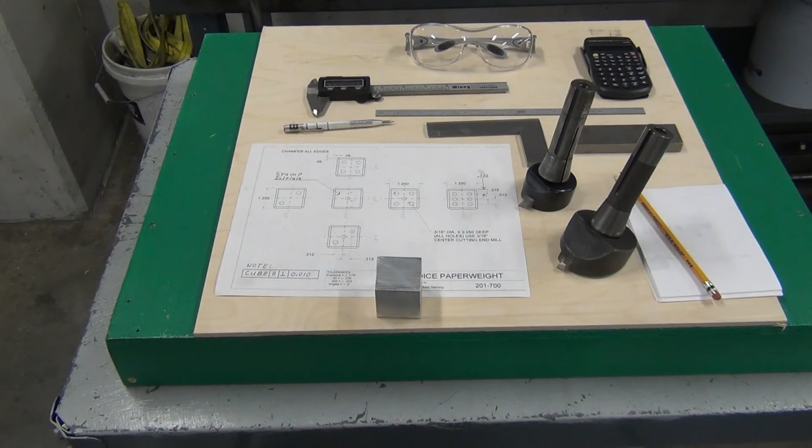Okay, now that we have the block sawed out, we're going to begin squaring the block up. That would be the next step in making the complete project. We're going to make this particular project 1¼ inch by 1¼ inch by 1¼ inch square. That's going to be the end result.

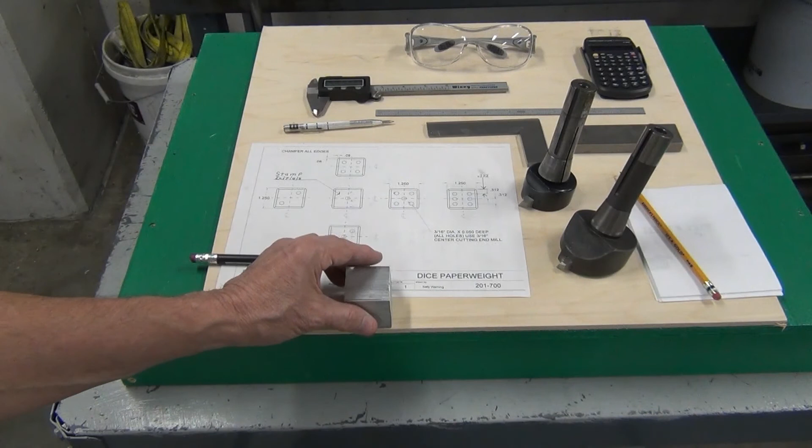When we first get started, we're going to machine these rough sawed cuts to get them to at least a reasonableness, because in their present state they are of no value. The first one we'll eliminate by cutting one of these two surfaces first.

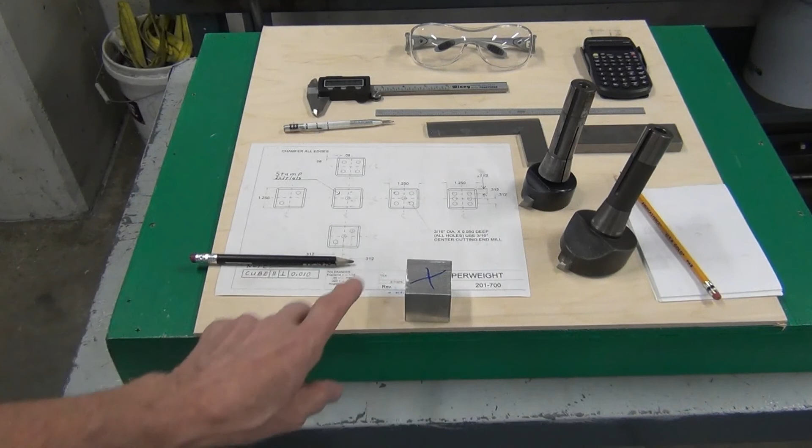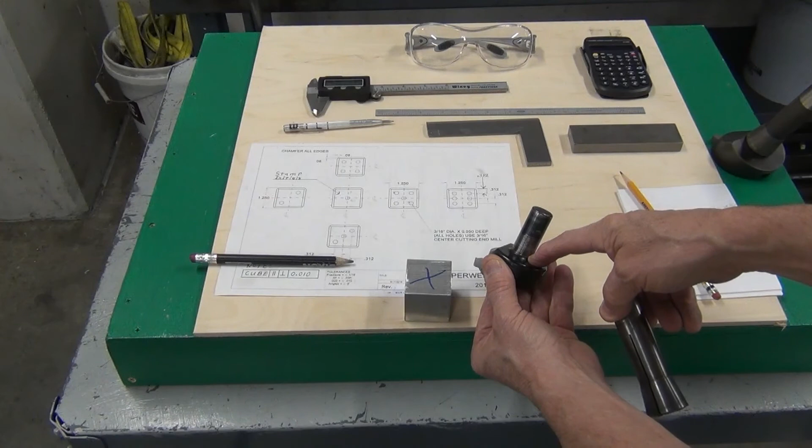The tooling necessary to complete the job, we'll have to choose a fly cutter. We have two styles: this style with the built-in collet, and this style where we have to put it into a collet. When we put it into a collet, we don't want to push it as far down as it'll go, because we may wind up biting on that radius in some fashion. So we want the smooth part of the collet to intersect with the smooth shank of the fly cutter, and go in something like that.

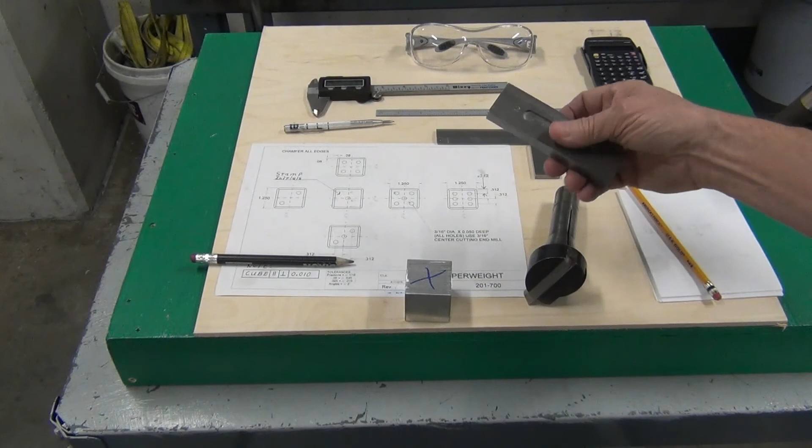We'll also need a square in order to set our block in and to check squareness thereafter, to make sure that the block is coming out square. We'll also have a need for a parallel after we get done with the squareness, in order to set the block on to bring it down to size.

We have a pencil and paper so we can do our math as we go along. I encourage all the students to do their math as they go, so I can walk up to them at any time and say, how much more do you have to come off? And they can go to a spot on a piece of paper and say, this is how much more I have to go in order to achieve that particular dimension.

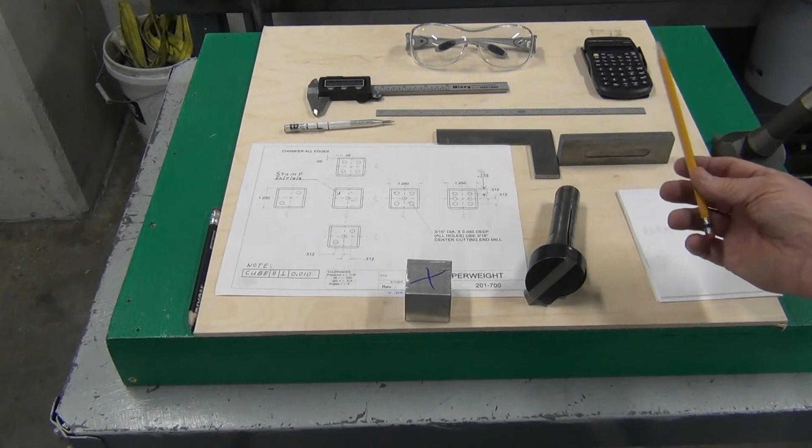We can also indicate to the students to be mindful of their tolerance. This is a 3-place decimal, 1, 2, 3 behind the decimal point. And if we come down here and look, the 3-place decimal is plus or minus 10 thousandths.

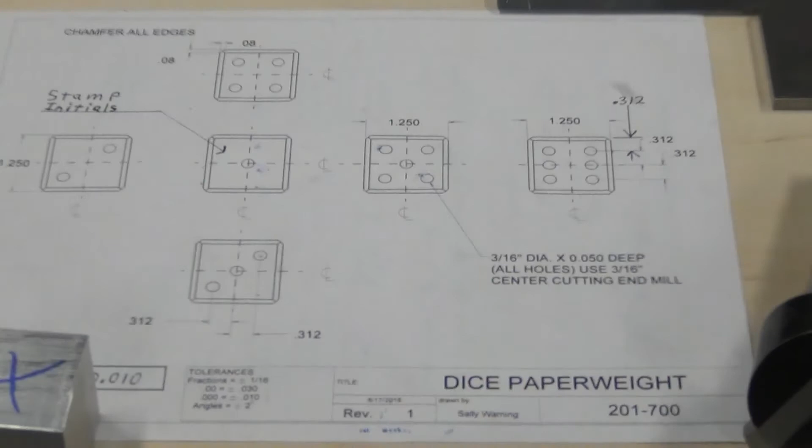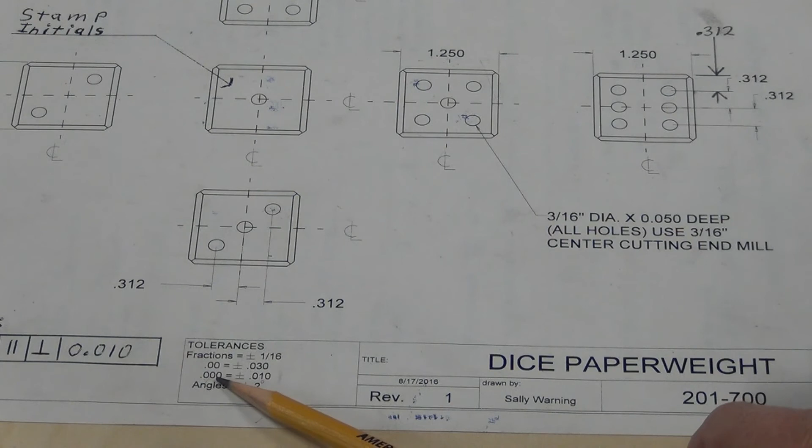I'm going to zoom in on the print so we can get a little better look. On the print here, what we have is a perpendicular within 10 thousandths of an inch as far as what we want on the special notes. We have a plus or minus 10 thousandths on the dimensions, the 3-place decimal. 3-place decimal back is what we're trying to achieve, and we're going to go ahead and get started.

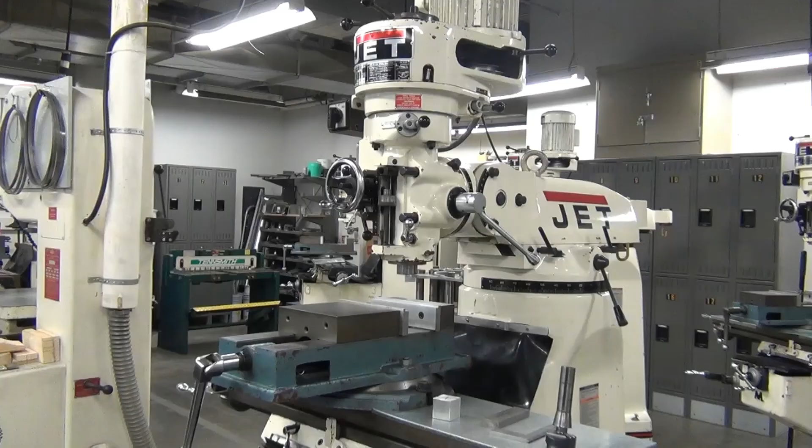The first thing as we get started, we've selected the appropriate collet to go around our fly cutter and hold it in place. We've wiped it off with our hand to make sure there's no debris on it of any sort. We've pushed our finger around on the inside to make sure that on the taper area, which it'll draw up on, there's no debris in there.

We can put our collet in first. Again, the slot that we have here is not going to come into play right now because there's no pin for it to go into. So we can push this up in whatever place we want.

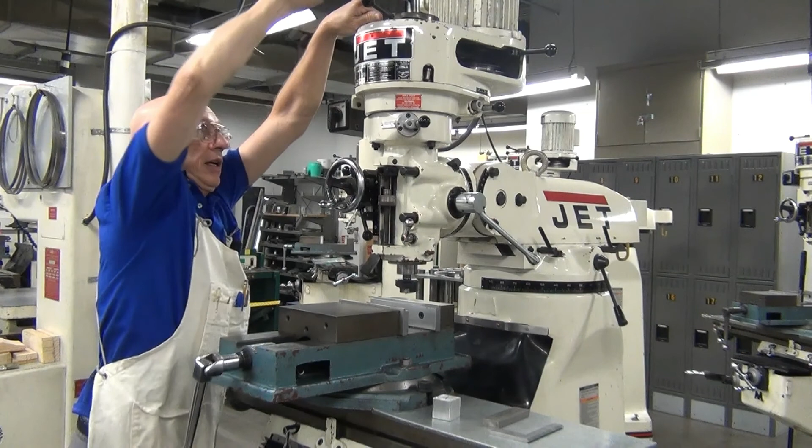I'll put it in there, spin it by hand on the drawbar to get it good and snug. Get our combination wrench and hammer, put it up on top of our drawbar. We're going to snug it up a little bit by hand, then push our brake, pull it tight, let go of our brake, push our brake, pull it tighter. Okay, now that's good and tight in there.

I usually like to spin this around over to here so I can see what I'm doing when I start the cutting. Now I'm going to show you out here what we're going to do. I run this across the top, feeling if I hear a click, like if there's been a burr or somebody's dropped it on the floor. This seems to be in good shape.

We're going to take one of our surfaces that came from the manufacturer and put that up against the solid jaw in the back, and bring the movable jaw up to this location. In order to orientate this in a square fashion, there are several ways that can be done. This is the way we wish our students to do it, because it gives them experience on how to use a solid square. There's a couple of different methods.

One method is to put your thumb down here, bring the block up to there, and hold it thusly, then bring the open jaw closed. Another method I've seen students do is to hold it against here like so, but the trouble is trying to straddle this slot is very difficult. A person could try it across here and close the vise this way. I find those two methods rather cumbersome, and I like to just put my thumb on it down here and close the vise. That's what we're going to do.

I'm pointing the camera now up at the ceiling because if you go up against a light or a white surface, it makes it easier to see. There are the two sides right there that we just machined, that side and this side.

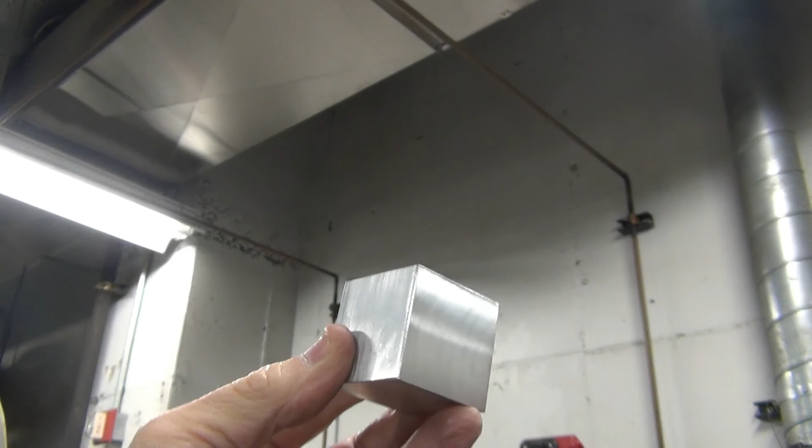Okay, we're going to take our solid square and put it like this. We're going to run it up and look to see if we see any daylight coming out in reference to under this blade up here on the top. That looks like it's really nice and square to our combination square here. So we're pretty good.

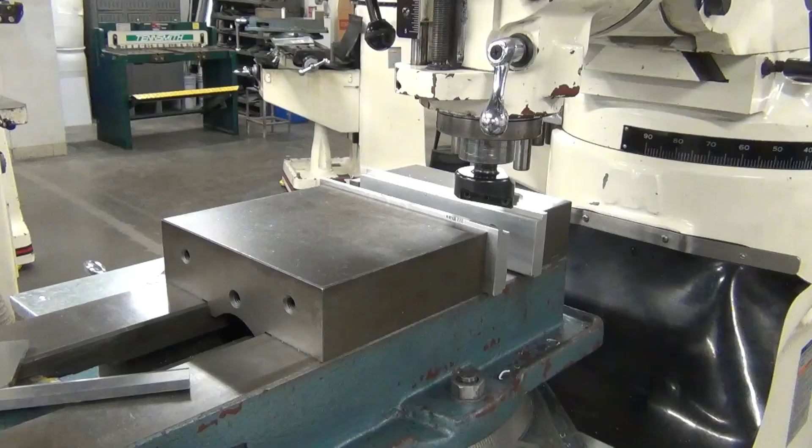Now that we have two sides square, I took my blue Sharpie and put two lines on there to indicate these two surfaces are perpendicular and are not to be machined anymore. I use a blue marker. The machine technician that helps me with the class uses a red marker. The TAs, the teacher's assistants that help me with the class, which are students that have already been through my class and scored some of the highest grades, they're allowed to come back as teacher's assistants. They use a green Sharpie, and all the students use black.

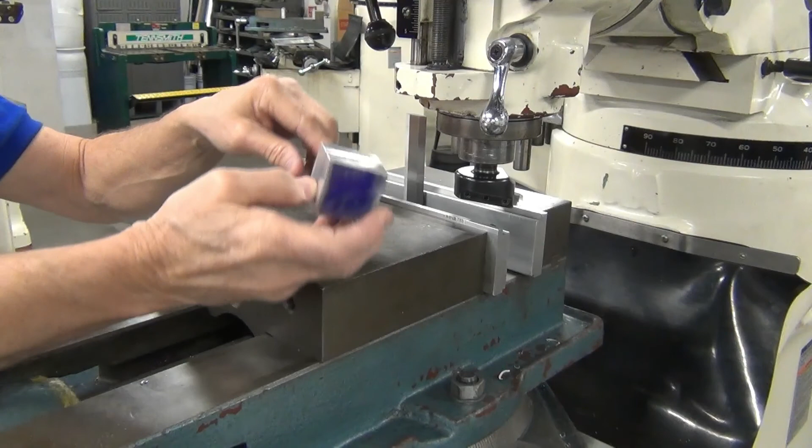So that way I can know when I look at the block who's determined that block is perpendicular. Now, that said, we're going to put one surface against the back jaw, which would be this one here, and then take the other surface we machined that's perpendicular and put it to the other side. So we put our square back in. We have the one surface there that we're going to put in like so, and the other surface there is going to go against our solid square.

We're going to stick it up just above the vise, clamp it in, slide the square, double check, it looks good, good and snug. We're going to turn our spindle around without getting our hand down there where that cutter is, it's sharp. Bring this around, bring it up till we get close, turn our machine on, bring it up till it scratches.

Okay, going to bring up about another 3. Nice and slow across there. Shut our machine off, hit our brake. As you see, we stopped where if we drag it across now, it'll scratch our work. This could be a finished cut, so it does make a difference.

We turn that out of the way. We bring this on across. We're going to take and pull our block out. Okay, we're going to deburr our block.

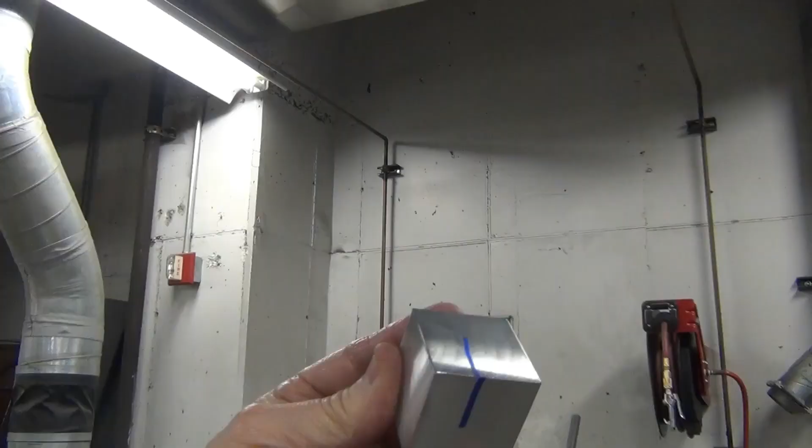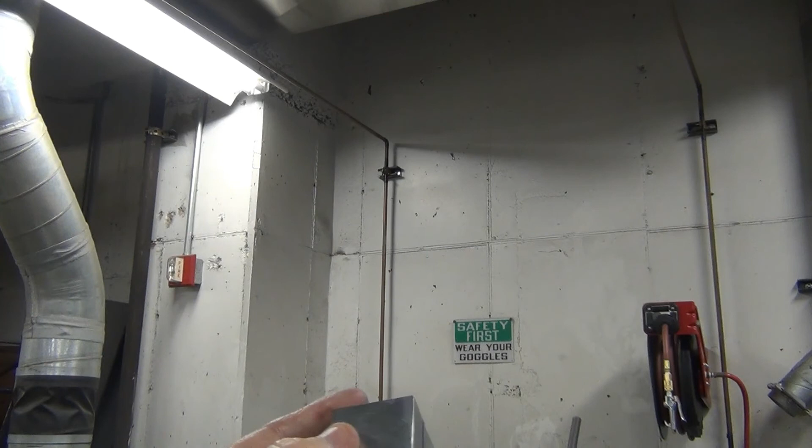Now we're going to check it for squareness. These are the two sides that we originally did for squareness, and as you can see, the blue mark is there. We went ahead and machined this side here to be perpendicular to these two.

So we're going to take our combination square, throw it on there, hold it up, take a look. Looks good. Now we're going to check it to this side, throw it up, take a look. Looks good. Okay, that's a good part.

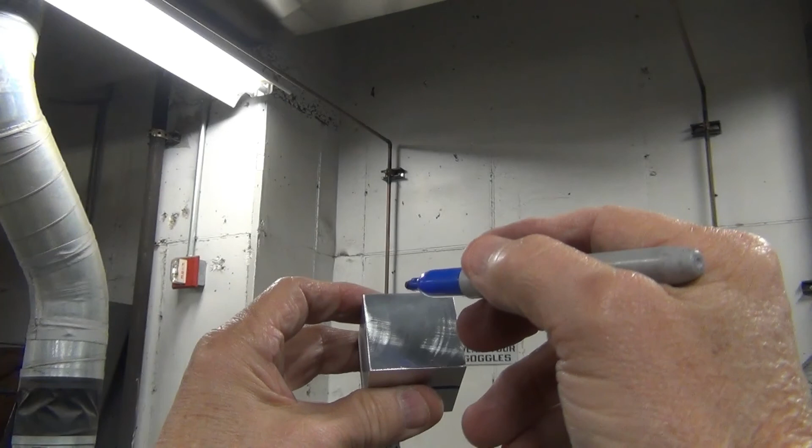Now we're going to go ahead and take our Sharpie, since we got this part looking the way we want, and put our line there and there, put our line there and there. Where it looks like this, that means those sides are done and not to be cut on anymore.

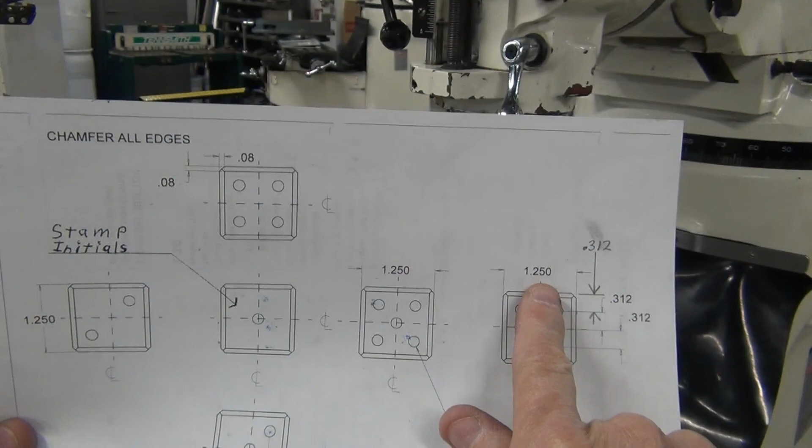I want to put the print back up here to remember the dimension we're going for is 1 inch 250 by 1 inch 250 by 1 inch 250.

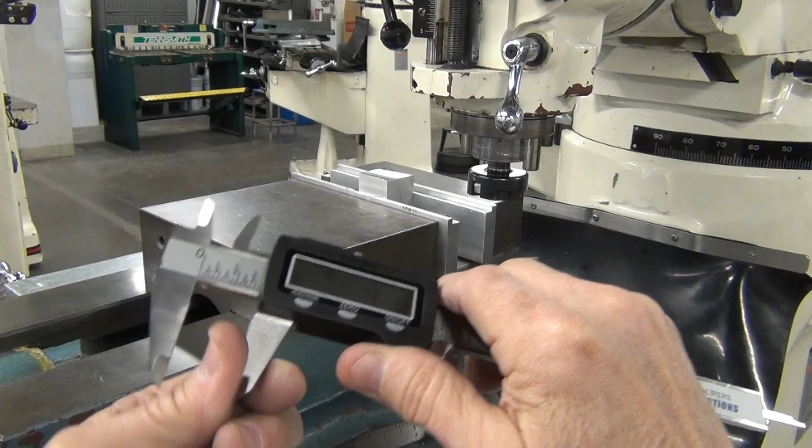That said, we take our calipers, we turn them on, we clean out our jaws, make sure they're good and clean, bring it down to 0 to make sure it's 0. If it's not, re-zero it. These look pretty good, so we're ready to measure.

We come over here, we put our calipers in. I'm going to squeeze between here and here to get our calipers. We don't use our calipers down on just the edges like this. That's bad juju, that's going to give you false readings. You bring your calipers in to where you have the majority of the jaw crossed.

These calipers are measuring 1 inch 494, is what it's measuring. So we're going to write that down on a piece of paper. We come over here and down to our print where we're going to keep our scratch paper.

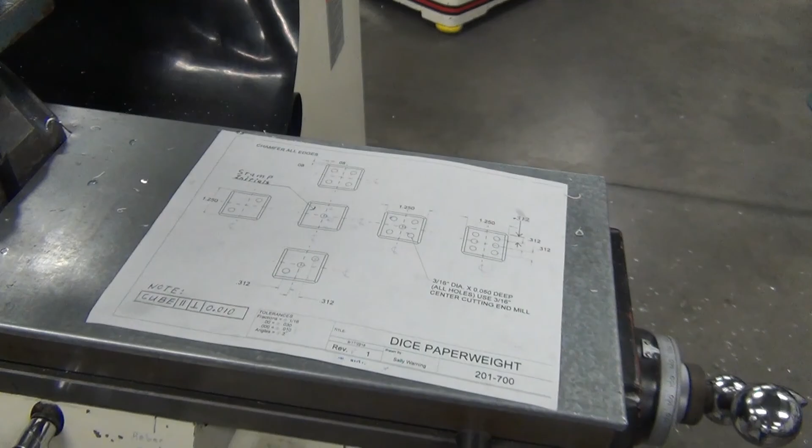Our measurement was 1 inch 494 thousandths. We're trying to go to 1 inch 250 thousandths. You do the math on this, you come up with 244 thousandths to take off. Our machine is graduated in thousandth increments. We don't want to take any more per pass than 50 thousandths.

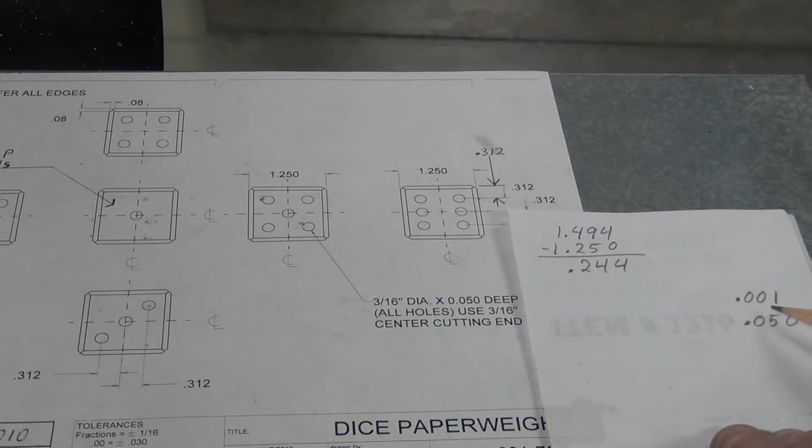The whole idea of our shop class is to learn how to run the machine. So we're going to take this down in 50 thousandth increments till we get down to a finished dimension of 1 inch 250.

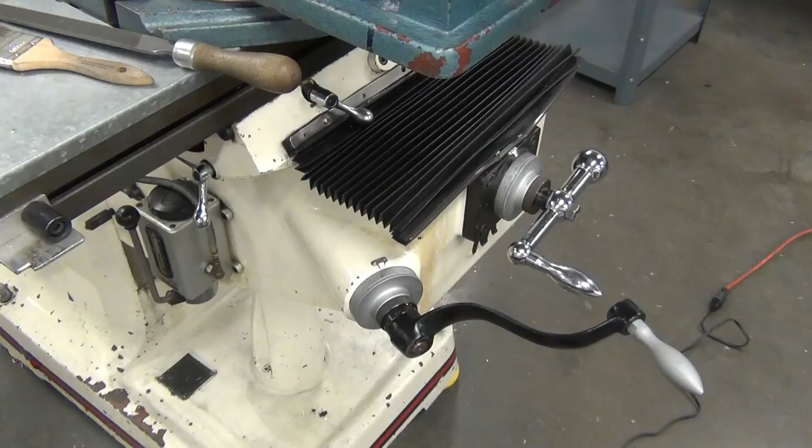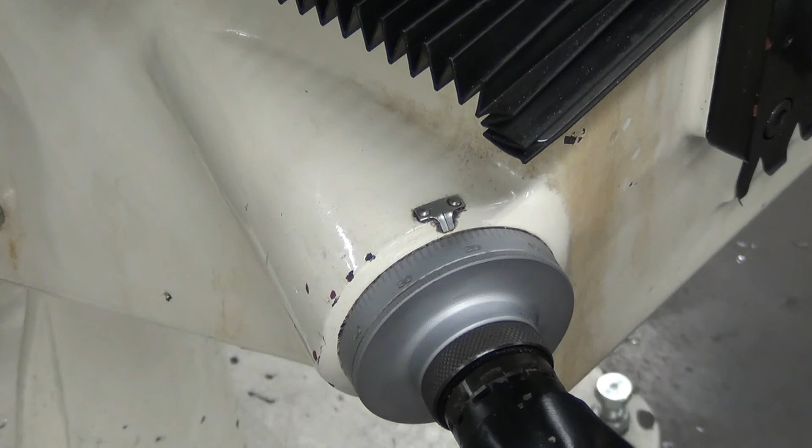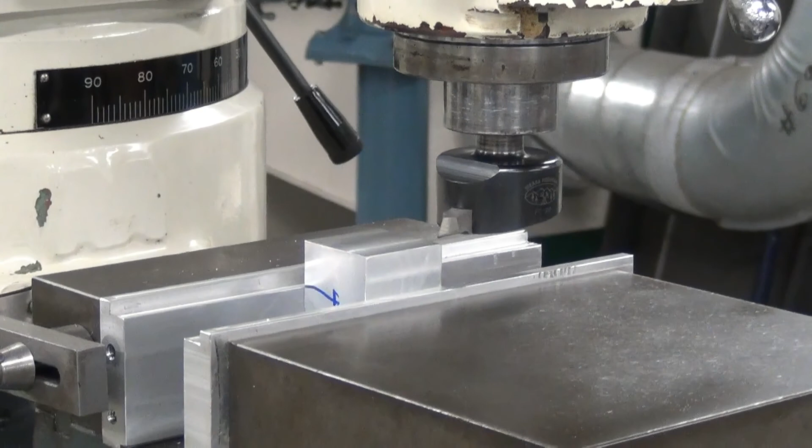We're right at that where we left off. We're going to loosen our collar, spin our thimble around, put it on 0. We're going to crank it up. 10, 20, 30, 40, 50. I always like to bring the handle around here so it keeps the weight on this side. Come back up here. Cross.

I'm going to raise it up 50 more thousandths, which means we've taken 150 of our 244 to come off. I'm going to bring this back around to 0. Turn on the machine. Bring this pass on across.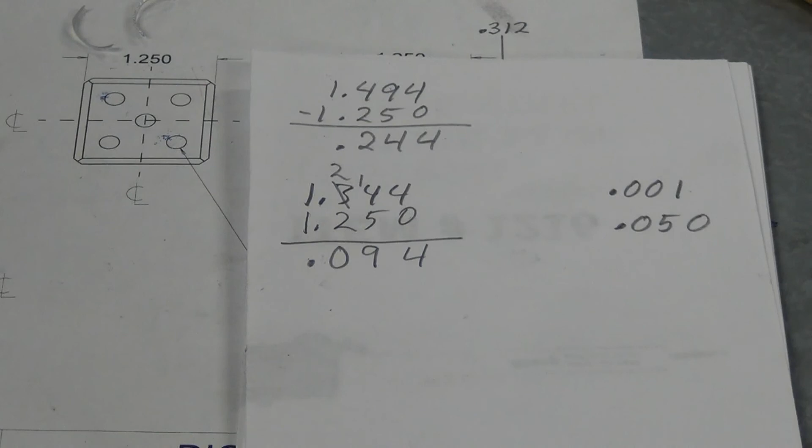Shut the machine off, hit the brake, come on across. We're going to take this opportunity to take a measurement and see where we're at. As you can see on the math, we have 1 inch 344 thousandths minus 1 inch 250, or 94 thousandths left to come off.

We have approximately 58 thousandths to go, so I'm going to bring it up 10, 20, 30, 40, 50. Take that pass off. That'll leave us about 8 thousandths for our finish cut.

Now we're going to bring it up that final 8 thousandths. Take our part out of the vise, deburr it.

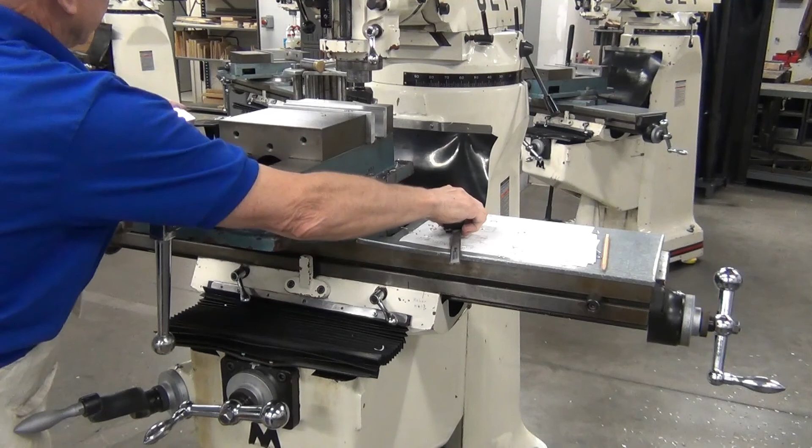Make sure we're 0 on our calipers. We have 1 inch, 252 on our calipers, 2 thousandths over nominal, right there in the ballpark. Okay, we have one side left to go to bring down the size.

We take and go in there, brush out our chips, make sure our vise is all nice and clean on the inside. Double check it. One side, the blue side, is going to go to the back jaw, down like so. Close up our vise.

Good and tight. Spin our cutter around so we can see where we're at. Back this off. Bring it up close. Turn it on till we scratch.

Come off. Take off 50. Come back across. Take off another 50. That's 100. Come back across. Take off another 50. That's 150.